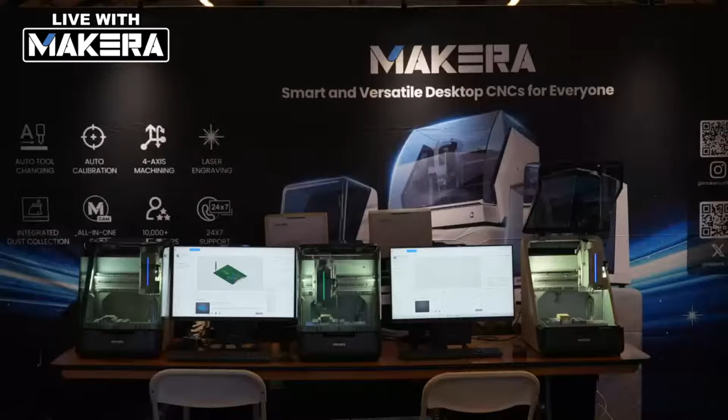Hey, everyone. Welcome. Hey there. Hello, everybody. Good to see you. How you been? It's great to be here. It is so good, right? It's pretty exciting. Hello, everybody.

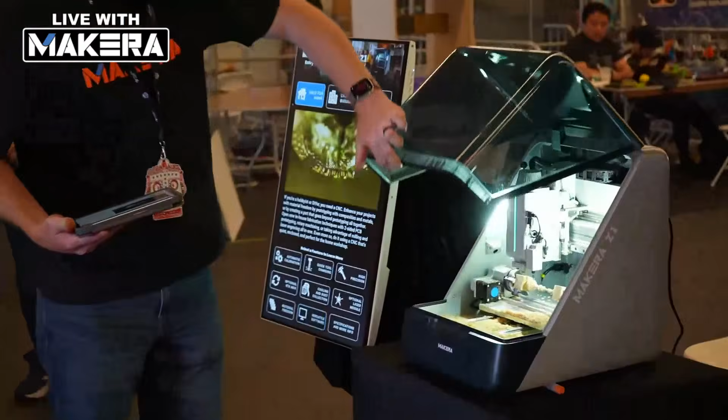So let me walk you to this machine right here. This is a Z1, not a Z1 Pro, this is a production Z1. This one is actually showcasing our fourth axis module. Let me open this guy up. I should point out that I have the safety disabled, so I can open the lid while this is machining. You can see that this thing is actually running a pretty cool chess piece, which is one of our favorite projects to do with the fourth axis module, machining out of wood.

Now, we get to meet a lot of really awesome people here at OpenSauce, and we've met so many people already. They're like, oh my gosh, I have an Air, a Carvera, and a lot of Z1 backers. And actually, I want to bring in a Z1 Pro backer. So everyone, this is Jessica.

Jessica, nice to meet you. Nice to meet you too. So listen, we're connecting with our Makera users. I'm super excited that you're a Z1 Pro backer, and that you got your shipment notification. What do you plan to make with it? Mostly droid parts. Droid parts, that's pretty cool. Yeah, I'm a droid builder, one of the people driving around in R2D2 here at the whole event. Awesome, I'm really excited to have this because the spindle in there is going to let me make some parts that are really hard to come by in the community. That's awesome.

Have you been to OpenSauce before? I have not been to OpenSauce before, I'm excited to be here. So I know you have a booth set up. Yes, we do. So far, what's your favorite thing that you've seen? Probably just all the nerds. Yeah, it's fun to be around so many awesome people who are interested in similar things.

That's awesome. Well, again, Jessica, thank you so much for swinging by. If anyone's here, do you know what your booth number is? I don't know what our number is, but we're very close. Find Jessica, check out the droids, it's cool stuff. Thank you so much for joining us. There's a little gift for you. Oh, thank you so much. All right, enjoy your OpenSauce. Cool. All right folks, so that was this side, I don't know if that's the left or right side, but it was this side, the side I'm over here.

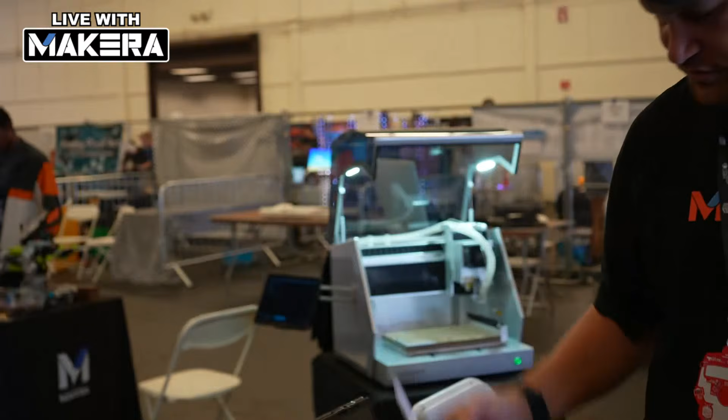Here I've got the tank. Last year, this is the tank that they made. Let me see if I can give you a little close-up here. The top is actually milled out of wood. The PCB on the inside, you can't see it now, but the PCB on this is also milled on this machine. And that's like a piece of metal that you can also cut from the machine. So that's what we're currently doing on the Carvera over here.

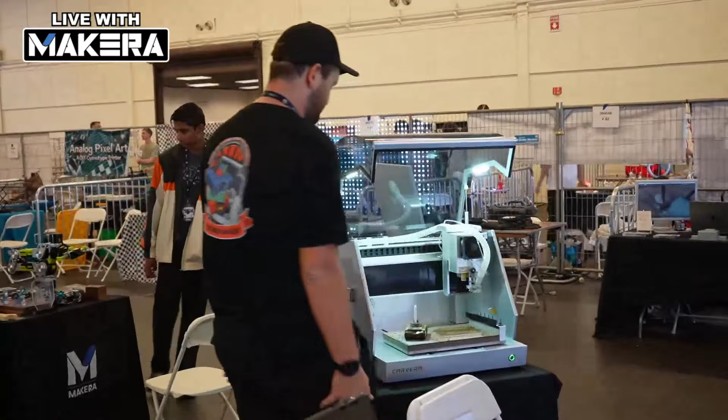People just see it, and then they ask, where's the limit? What can you not do? But it's so complex, and we're making so many cool things.

Now I'm going to move a little back towards this side. We have a lot more samples on here. Look at this arm, the plates on this arm are done on our machine. Actually, this is one of our people that also have a booth here, and they're making these arms, and the parts are actually made in the Carvera.

Aluminium things. We have this RC car. This plate's milled on there. The rims are milled on there. The gears are milled on there. The chassis pieces. We have this little guy - we have a YouTube video about this. This guy actually flies. And then we have a Z1 running here with a vacuum bed.

And it's been doing pretty well. I think it just finished, actually. So from the vacuum bed, I'm just going to pull off this thing. Let me see that, I'll show it to him a little nice and close. Oh, there we go. Why don't you tell him what we're doing?

We are just engraving the plastic sheets that we have also in our stock that you can put together. You can make cool things like that. We've actually imported the OpenSauce logo, and then also put our logo in there, so it's a cool looking tag. We're going to put it on people's tags. We're just excited to be here. This one's got the vacuum running, so the vacuum bed is keeping the thin materials nicely to the bed.

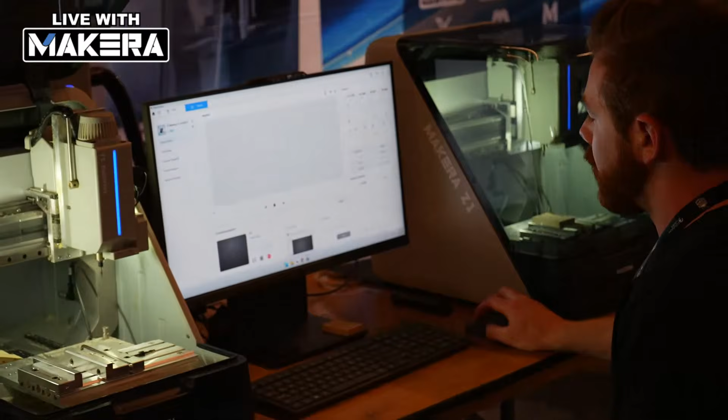So we're gonna take a selfie. Pull up a chair, grab a chair. Let's get our camera operator to check out this screen here. Are we doing portrait? We're gonna go wide, landscape. Okay, move up a little bit.

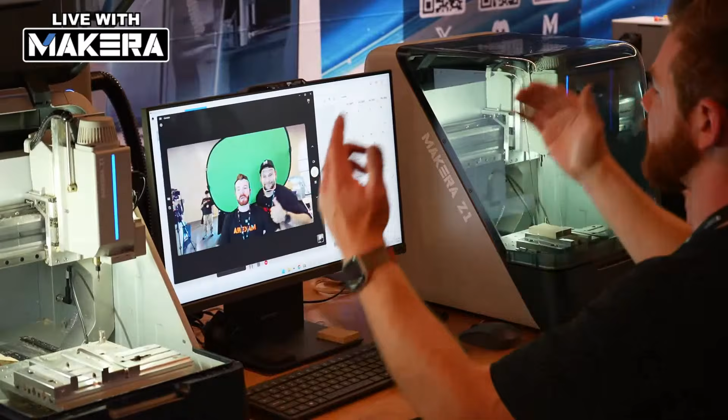So camera operator, you can see our screen right now, which is pretty cool. Can you see this big screen behind you? No, but you can see this, right? So basically what we're doing here, folks, is I'm just using the webcam built into these computers. We have a couple computers set up. Loki, can you come down a little bit, and then go towards Jesse a little bit. A little bit of a shadow there.

There we go. All right, so we're gonna take a picture, right? Here we go. Snapped. Oh, sweet. All right, that was the hard part, guys.

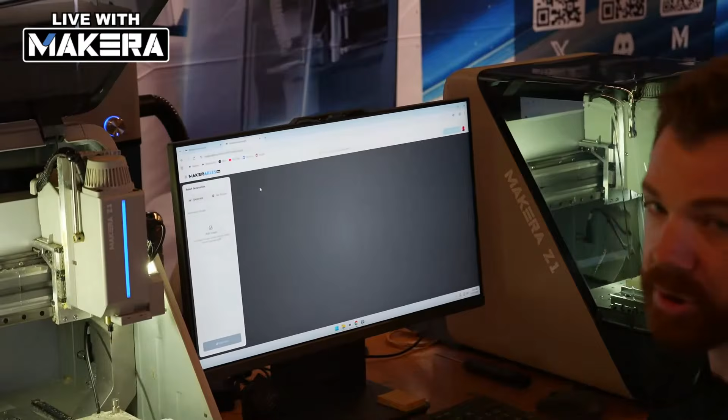Now, once we have our selfie, we can try to use Makerables to actually generate that selfie and turn that into a 3D model. So I mentioned this earlier, this is Makerables. I know you guys can't see this really well right now, you're just looking over my shoulder, right?

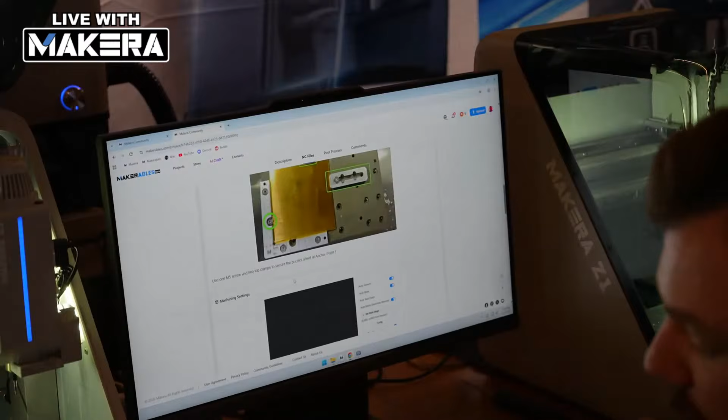But it's a pretty cool site where you can find projects and guides from any users and also us. As you know, we create a lot of tutorials, we show a lot of cool projects. Anytime we make a tutorial moving forward, and we're also going back and adding some tutorials from the past, we're gonna give you the design files, how we made it, all the different settings and things like that.

So it's a pretty cool spot for you to get files and things right on the site. But there's also this cool page called AI Craft that will allow you to generate models just from prompts or images. So I'm gonna open up 3D Relief and grab that picture of Rulof and I. Here we go, so let's crop this in a little bit.

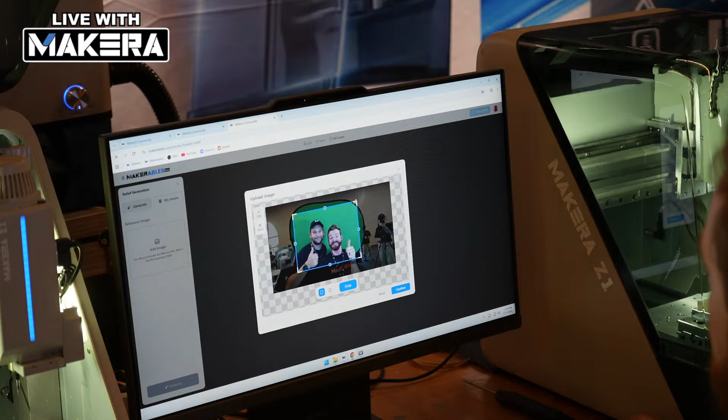Bring that in. Cool. And let's go ahead and generate this. Now this could take a couple minutes, we'll see how good our internet's going right now.

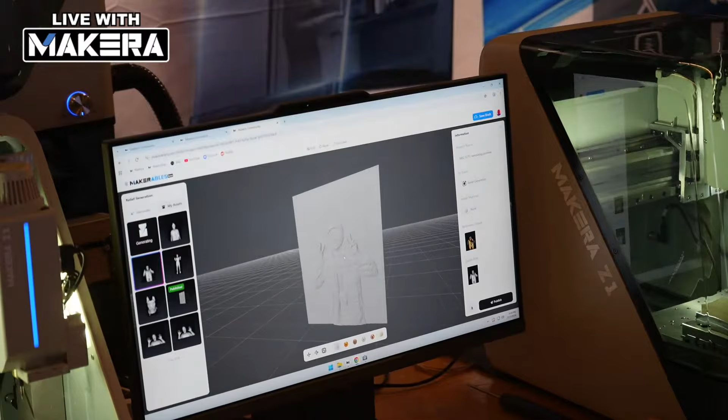It's moving, but while this loads, I can show you some of the other ones, right? So you can simply take a picture and then convert that picture into a 3D model where you can specify the different dimensions. So here's a pretty cool selfie, color as well. Yeah, you can change it to a different material, like you can preview it in a nice light wood, which is what we're doing right now, and things like that, which is pretty cool.

So lots of cool things you get going on. As you know, every time I do a stream, I do try to bring my dog into it. So let's not beat around the bush here, we can get that out of the way. There he is, there's the pup. So he's not here at the show with me, so I couldn't take a selfie of him here.

But if you don't take a selfie with your webcam, you can upload a photo from anywhere. So that's pretty cool, right? So this guy's still just loading.

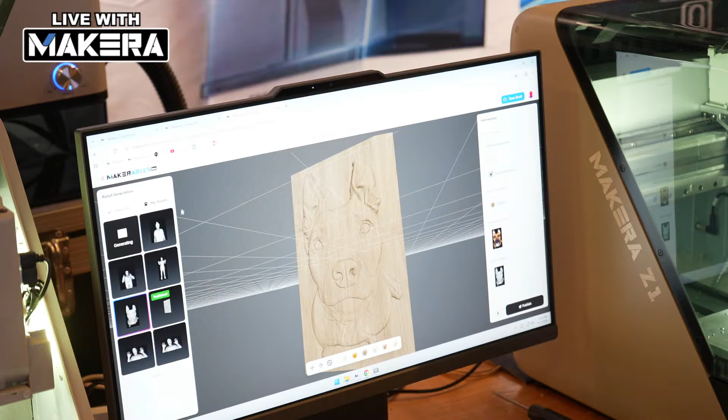No worries, like I said, this Makerables is live. So we do have a bunch of users that are on here posting some pretty cool projects and things like that, a wide range of organizers, cool tools, jewelry, all this different stuff. So again, thank you immensely to all of the beta testers that helped us bring this online and all the folks that continue to use it every day and just upload some pretty cool stuff.

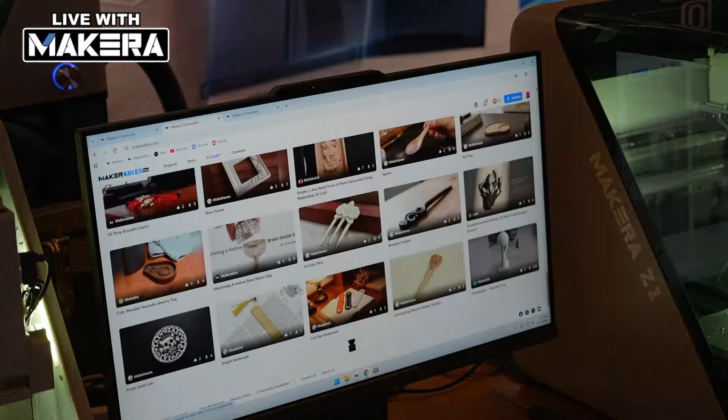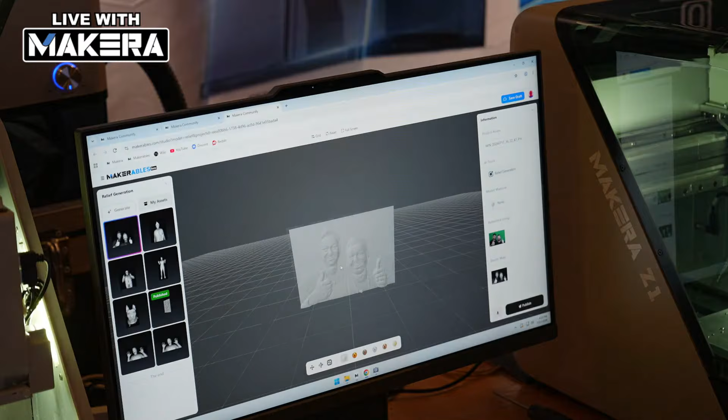Let's see how we're doing. Here we go, all right, our relief is done. Let's check it out. I do feel like our AI adds like 20 years of age, but nonetheless, I think we look great. It got the M of your hat here. Let's see if I can make it wood and it looks a little better on camera.

That's pretty cool. Now we have our model, so that looks great. You do have some basic CAD functions right here. So for example, I'm gonna adjust the size of this a little bit just to match the stock that we're using, so I'm gonna go 3 millimeters for this.

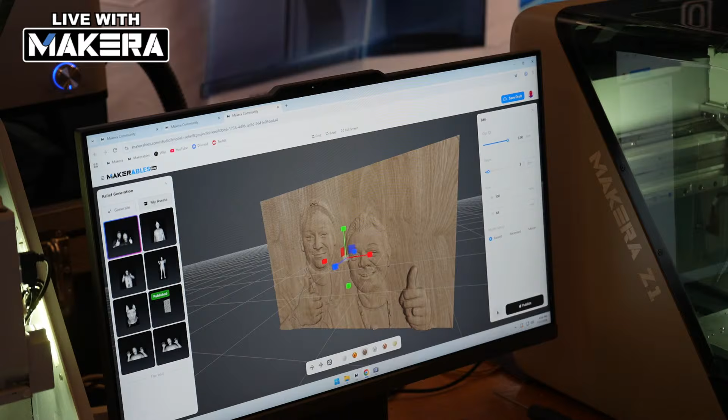And I think we're doing 62 by 45. Does that sound right? Other way around. No, it's horizontal. Oh yeah, so 62 by 45, right? Yeah, and 3, so that's just the size of my stock that I have pre-cut.

And I'm going to download that. All right, so that was pretty simple. So take a picture, turn it into a 3D model, easy.

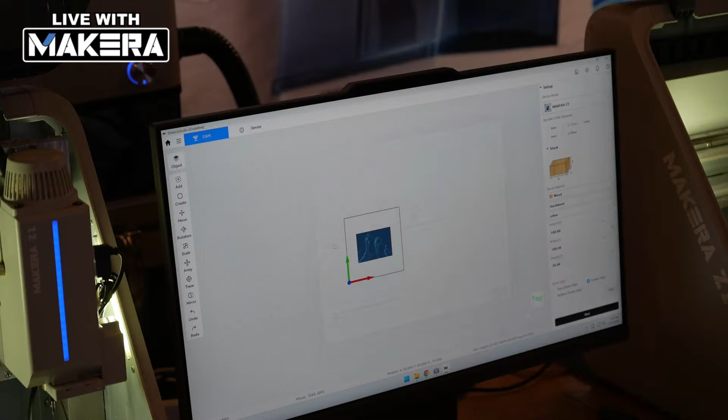So I selected my model. It's going to import. All right, there you go. And then on the right-hand side, we have some basic setup. So I'm going to use my Z1. I'm going to use my 3.175 millimeter tools. I'm going to use hardwood. And then I'm going to go ahead and adjust the size for what I'm doing.

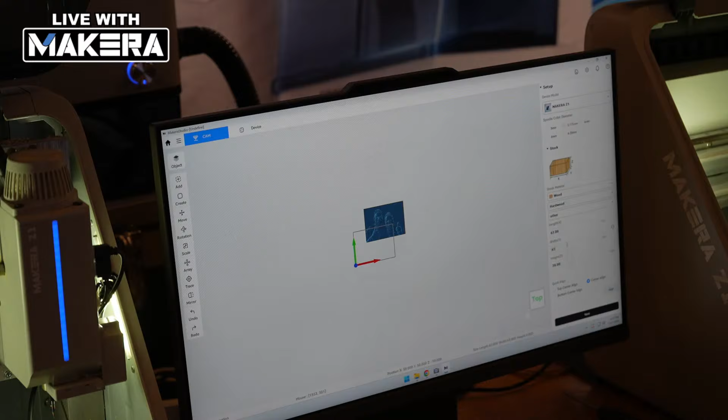So we're going to go 62 by 45. Oops, I did that backwards, sorry. 45 by 62 by 10. And I'm gonna automatically center my part on my stock, which looks pretty okay, except because I took a horizontal photo, I'm gonna do a basic rotation.

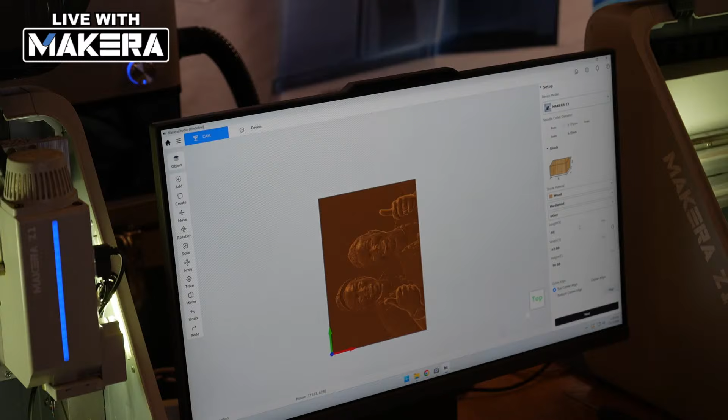Now the nice thing is, even though Makera Studio is a CAM program, you do get some basic CAD functions. So you get the basic ability that if you want to go ahead and manipulate your part just a little bit, you can, and we'll top center align. So that looks pretty good.

All right, so I have my stock, I have my photo, and like Roelof said, all I have to do is now click next. Now it looked at my model and it's recommending, saying, hey, I see your model, I think you should do a roughing pass, right? And it's also recommending some tools that we can use for the roughing pass.

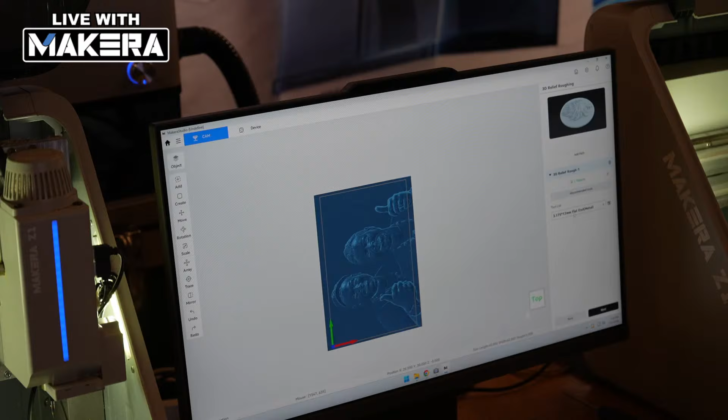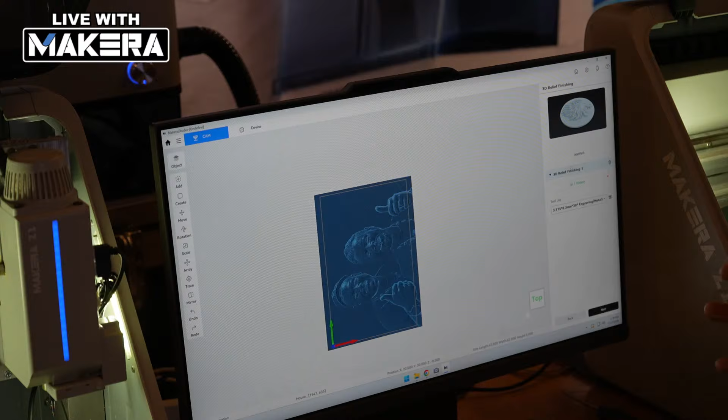I'm then just going to click next. And then it's like, okay, we did your roughing pass and I recommended the tool for the roughing pass. Now it's telling me, okay, I also think you should do a finishing pass, and here's the tool I think you should use for the finishing pass. Again, if you want to change that, you can, but I'm going to go with what it selected. So I'm going to say yes.

And then it's saying, all right, you did the roughing, you did the finishing, maybe you need a contour pass to cut this out. Now I actually don't need a contour pass because I actually have these blocks of wood that are already pre-cut, right? So I don't need to do the contour. So I am going to say no contour, right?

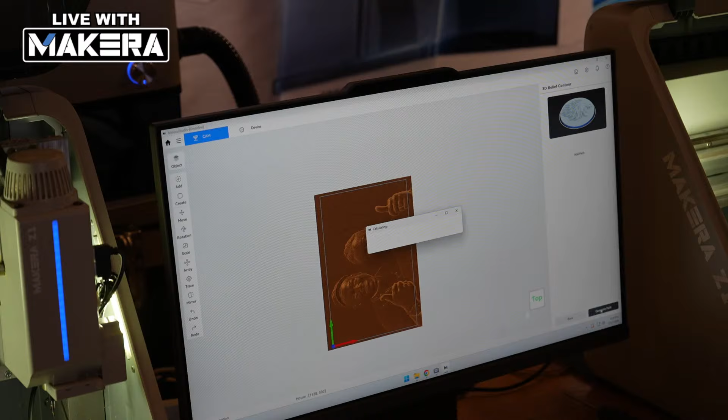And then I click generate, and it's going to go ahead and generate my roughing pass and my finishing pass with the feeds and speeds for wood for my Z1 with my 3.175 millimeter tools automatically, all within one job. So if I orbit around here a little bit, you can see we have our tool paths created. I have my roughing pass, my finishing pass, I have my bits.

And listen, at this point, after you go through the guided process, you can literally start cutting. Or if you do want to go into the advanced settings and you want to change step downs and step overs and plunge rates and feeds and speeds and depths and things, you do still have full control, full CAM control, but the guided mode will get you started for really simple projects. The next thing is, of course, to upload it to our machine and then get the machine ready.

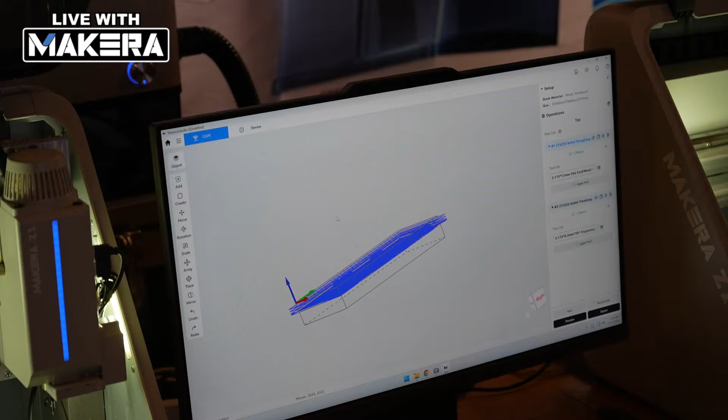Before we get the machine ready, let me show you the other cool thing about Makera Studio: the Cam tab and the Device tab. For those of you who are existing Makera folks, you're probably familiar with the Carvera controller app. Well, this is essentially our updated controller built into Makera Studio, which lets me connect to my machine right from the same program.

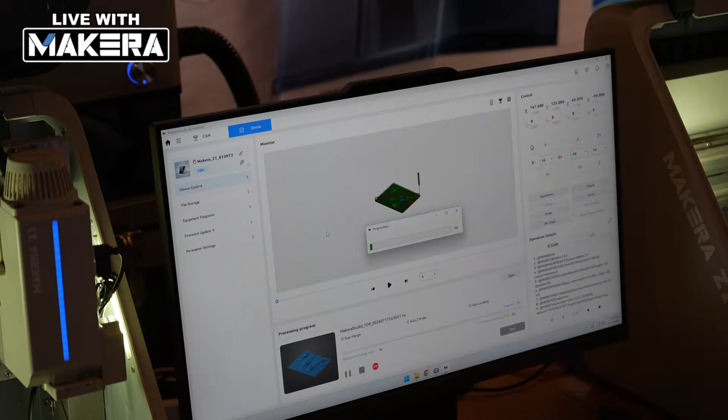And what's really cool is you simply click export and send this to my machine automatically, right from the Cam tab. For those of you who enjoy using Autodesk Fusion or SolidWorks, you can still do that. We have a standalone controller app, and you can also upload CAM files or G-code generated in other programs to your machine, just like you always could. We're not taking any features away, we're just trying to make things more intuitive and easier to get folks started quickly.

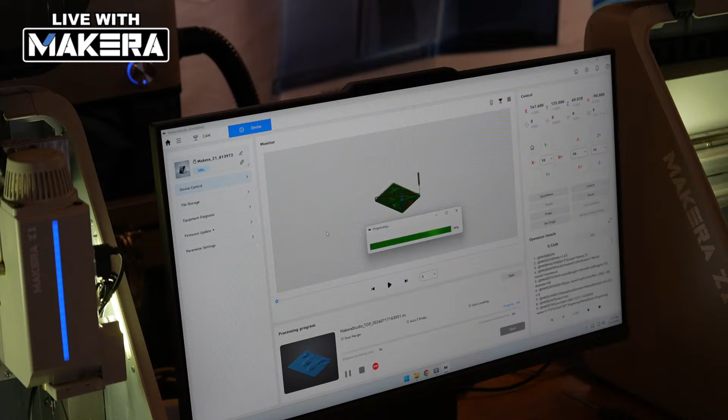So that's how quick you can prepare a model. I'm going to step out of the way and let Roelof show you how we're actually going to machine it on our Z1. Let's get the camera to pan over to the Z1.

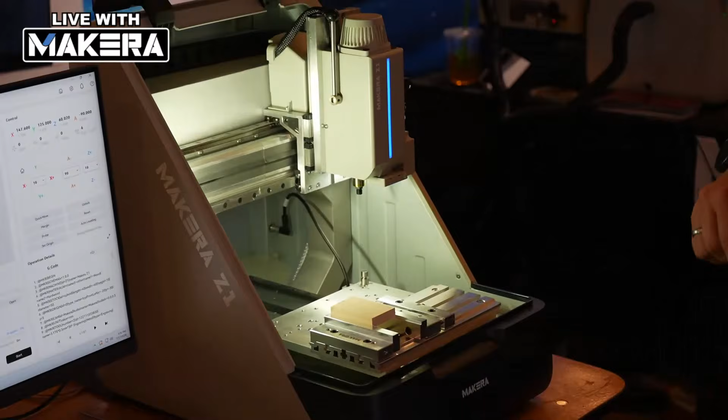So I'm over here. This stock has already been mounted, but as you can see, this is the new low profile vise that we have for the Z1. This will also be compatible with all our other machines, but this just shows you what it looks like and what it can do.

In this case, we actually mounted it to the top of the surface. We already have the offset set up, but we're going to do a scan margin anyway to show you exactly what it's doing.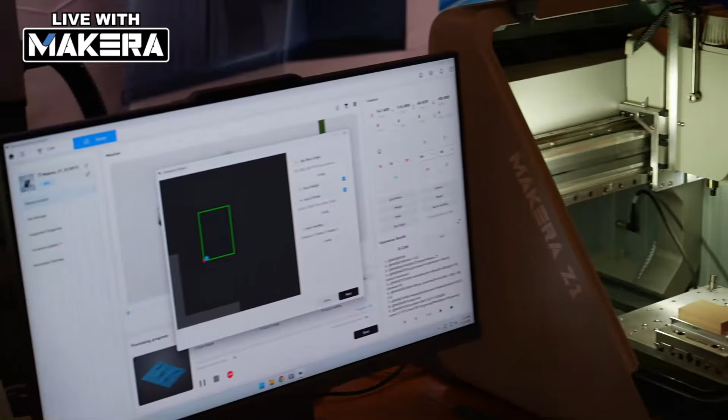So I'm just going to go to start, and now I've already got my positioning set up here. This is something you can either measure, or find or make a jig for, but this positioning has already been figured out. So what I'm going to do is add... that's not the right position... this is not the right position... okay, we will find that position.

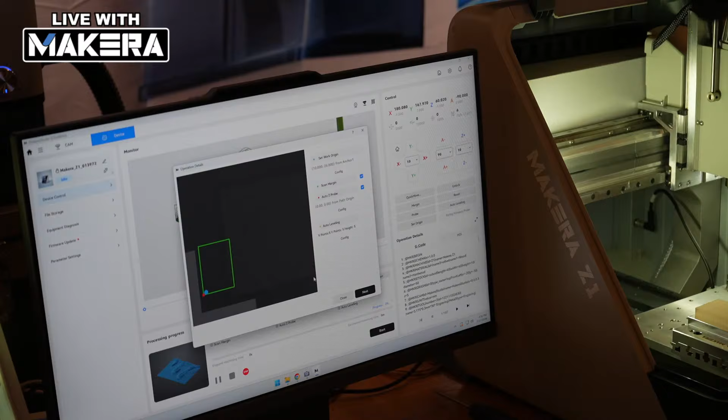For this job, I do not have to auto level, we're just going to find that middle. As you can see, there's a green line over here and a red line over here. So let me just put in the work origin. For X, it's 10 millimeters. And for the Y offset, we have 26 millimeters. There we go, that's the positioning of where this is mounted right now.

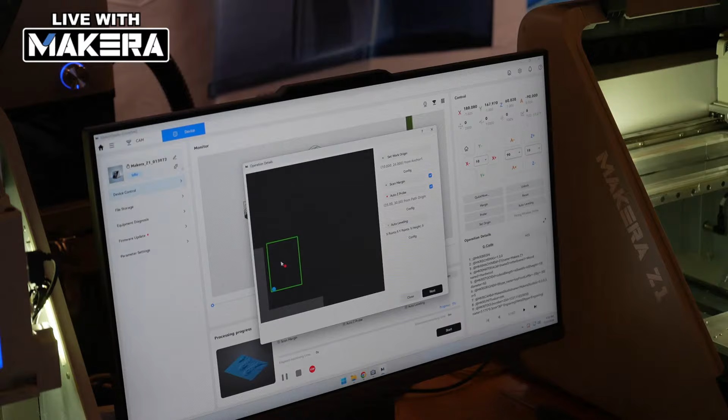Then what I'm going to do is go to the Auto Z probe. That's the little red dot you see over there, that's where it's going to go measure the top of the stock. For the work origin offset, I'll give it 25 for X and 30 for Y, which is pretty much in the center of this stock. If you can probe it in the corner that's not a problem if you have bigger stock, but for what we're doing we're just going to try to get as close to the center as possible. We know the pocket's going to push down the whole stock of material, so there's no need to do the auto leveling. Then we're just going to go next.

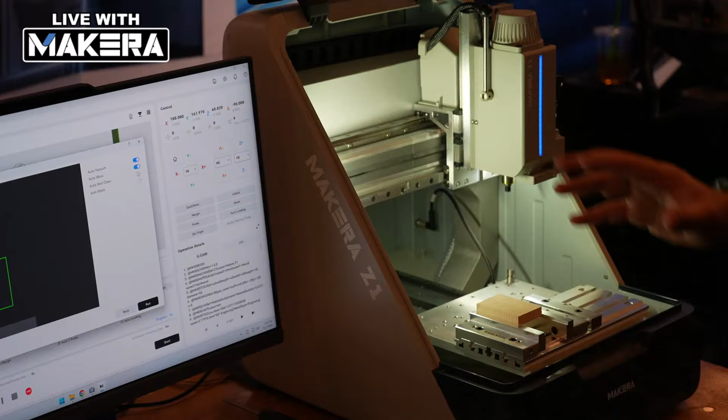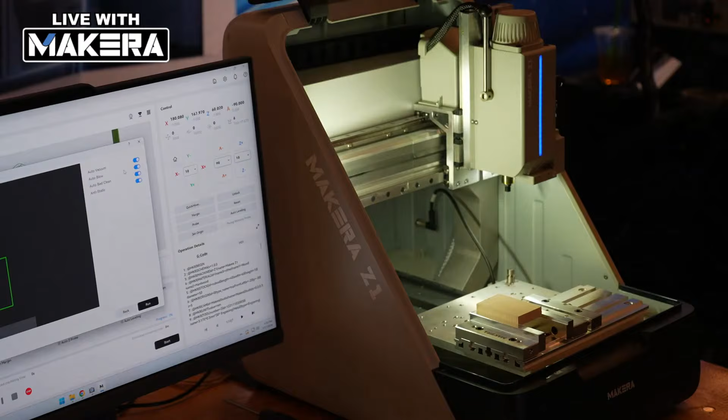Here you have the option to put the auto vacuum on, which we'll add since we have the dust collector connected to the vac. We'll turn on auto blow as well, which helps with circulation in the machine, blowing air through the pocket while the dust collection suction pulls the chips to the bottom in the back. We also mounted the anti-static to the side of the spindle, which keeps the window of the machine clear so chips don't get stuck to the sides on the inside.

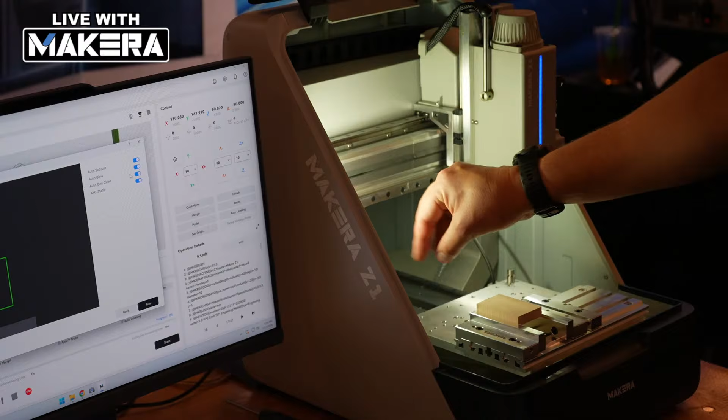The third option there is auto bed clean. After the job is done, it will go and pass over the whole machine, then use the spindle fan to clean up all the debris on the job. So we'll do that. We hit run, and currently the machine knows it doesn't have the right tool in there.

So the first thing that we're going to do is change to the probe. This is actually the tool that it was shipped with, tool number 6. And then we will put in the probe right over there. That's how easy a tool change is—no more old school wrenches, things like that. Just a lever, very simple.

And then you can either hit the front button of the machine, or on the controller, you can just hit go. Now basically what it's going to do is calibrate itself, then move over to the part. It's going to do the scan margin with the laser to see if your positioning is correct, and then go back. So we change to the other tool, and then we're good to go.

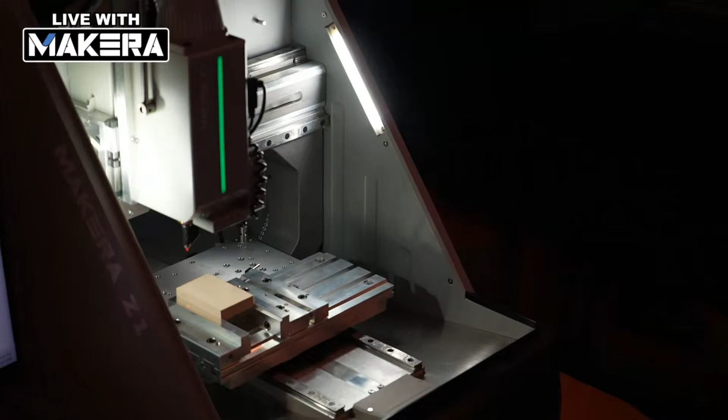Cool, let's see if we can get a little bit closer while we get this thing calibrated here. So we're bringing it in—and again, a huge thank you to our camera team that's working with us here to make this happen. So as you can see, there's a laser now just pointing. I'm not sure if the camera can really see that. It's just going to probe in the center.

Yeah, cool. So that just finished the probing sequence, and now we're going to go into another tool change. Notice that LED sequence—tell us about that. Yeah, so on the screen you can see it says please change to tool 3. What this is, it shows a 3 and a 1, so it's showing you to change to tool 3. And because it was a double beep, beep, beep, it tells you to change the tool.

Always make sure that your stock is very, very well secured. Obviously, we are using tools and cutting into wooden material, so there's a lot of forces in there. So always make sure before you actually do the job that the stock is very properly secured. And the vise makes that pretty good.

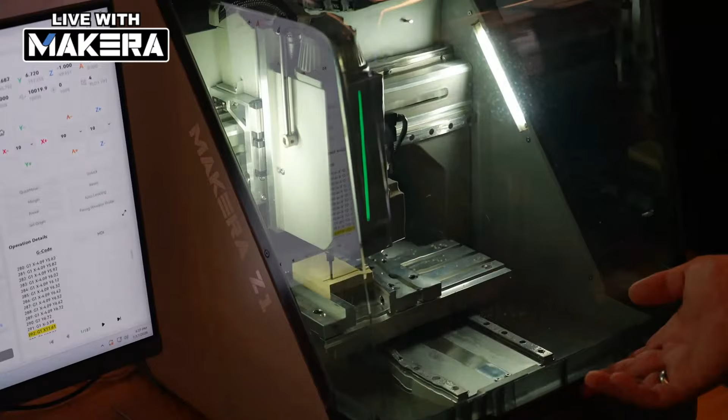Can I just note something? Look at how far the chips go as the lid's open. And look, when I close this lid, you can just see the chips just sucking back and going into the dust collector at the back. Yes, and the dust collector also switched on automatically.

So if you're running a job and you're not necessarily next to the machine, you can also look at the camera and connect to it to see the status of your job. And if you're done with the job, the vacuum will also switch off automatically. So yeah, that's pretty cool.

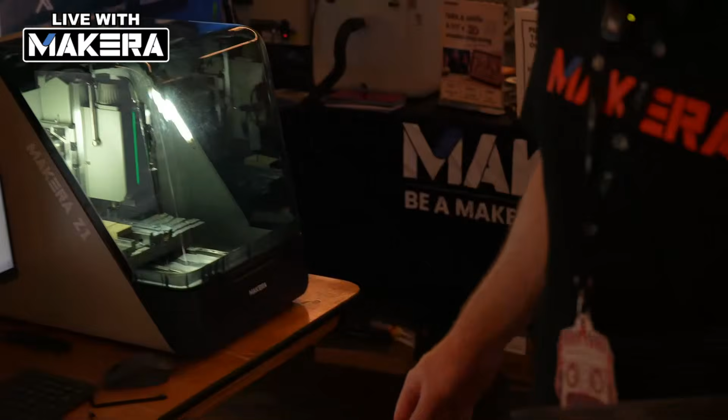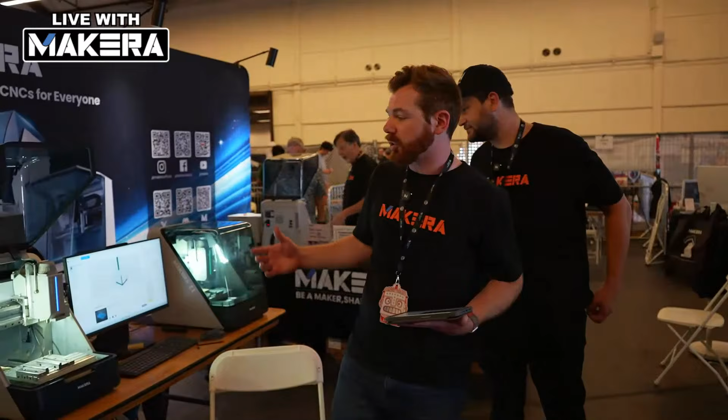So we are not going to watch this thing mill the entire time by any means. Like I said, it is going to take about 15, 20 minutes or so. But we are pretty excited that a lot of folks are coming over to the show, joining us here at Open Sauce, and actually having a chance to take a selfie, machine themselves out of a solid piece of wood and things like that, getting hands-on with the Z1 and Makera Studio to check out all the cool things that are coming out. So we're pretty excited.

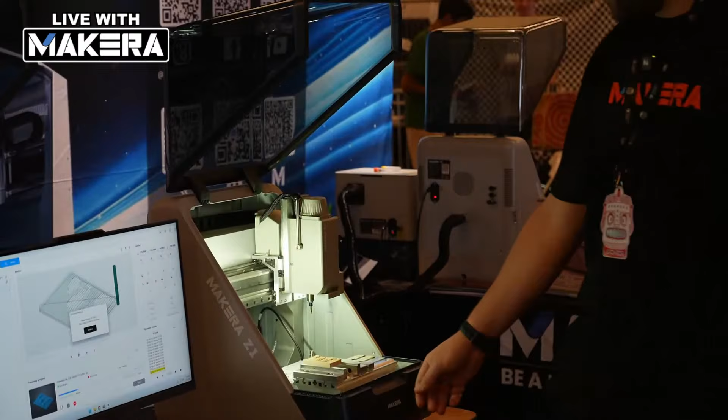That is time for a tool change. We want to do it real quick? I got it. Let's do it here. So super simple, right? Our roughing bit is finished. We're going to swap on over to an engraving bit for our finishing pass. This was the recommended tools by Makera Studio that just told us what tools we can do. Then just push the button to continue. That's going to go ahead and start to do the finishing pass. Pretty cool things.

Last couple things here that we're talking about as we're just getting the last couple things ready. Lots of exciting things going on. The show opens at, I think, 9 tomorrow, which is pretty cool. We are surrounded by content creators, YouTubers, creators, makers, educators, all of these different people that we're happy to chat with and collaborate with and bring on. It's a pretty cool thing here. So it's exciting that we're able to meet so many different folks.

I get inspired by really cool stuff that we have. I'm often humbled whenever I come here to see how folks are using our machines or other machines to laser cut, 3D print, do amazing stuff. So again, it's a pretty sweet thing to be able to meet. I hope I have the chance of meeting some of you, and it's been an absolute pleasure for you to join me here again. Rulof has been pulled off and he's talking to makers. He went over there for like 1 split second and he's been mobbed by people. So unfortunately, I think I'm gonna sign off here on my own, but nonetheless, stay tuned.